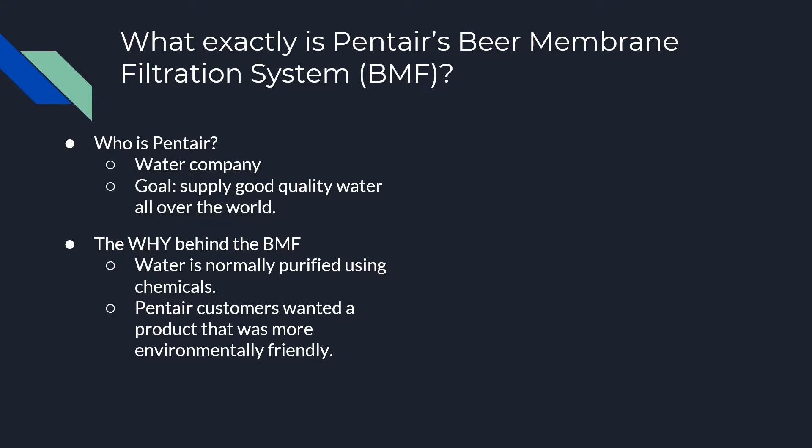So why decide to create a beer membrane filtration system? Traditionally, companies clean their water using chemicals. However, Pentair's customers were very concerned with ensuring that they were using environmentally friendly practices in all aspects of their business, including the water they use when making their products. This is what has driven the need to use membranes to clean or check the quality of water instead of using chemicals that could potentially be harmful. This is what has led Pentair to start designing their beer membrane filtration system.

So, what is the BMF? Pentair's beer membrane filtration system is a purification and filtration system that can monitor and then filter the beer based on the quality control settings that the customer has the system set to. The system also utilizes Amazon Web Services, known as AWS, which utilizes the Internet of Things and stores the information it gathers in the cloud.

Pentair's beer membrane filtration system serves two purposes. The first was to help create a more environmentally friendly water filtration process for Pentair's customers. Second, it was also created in order to help Pentair's customers create more consistent and better tasting beers.

So, what are some of the benefits? First, it significantly reduced the waste and water usage, and it also has automated much of the filtering process in the beer production process. Then also the Amazon Web Services Internet of Things allows companies utilizing the beer membrane filtration system to connect all of their systems and devices together.

This allows these companies to compile large amounts of data and analyze the data at any time and in any place, as long as they have access to one of the connected devices.

As stated earlier, Pentair's beer membrane filtration system utilizes Amazon Web Services. AWS provides many different services and tools that are easy to use and customizable, which is why Pentair decided to utilize the system in the first place.

Since Pentair had never used the AWS system before or anything like it in the past, they needed help. That is why they enlisted Brightwolf, an industrial solutions company that initially helped Pentair build their infrastructure and set up the AWS-based software system. After this initial setup, however, Pentair did form a dedicated R&D team that was able to make changes to their AWS system in the future as they needed.

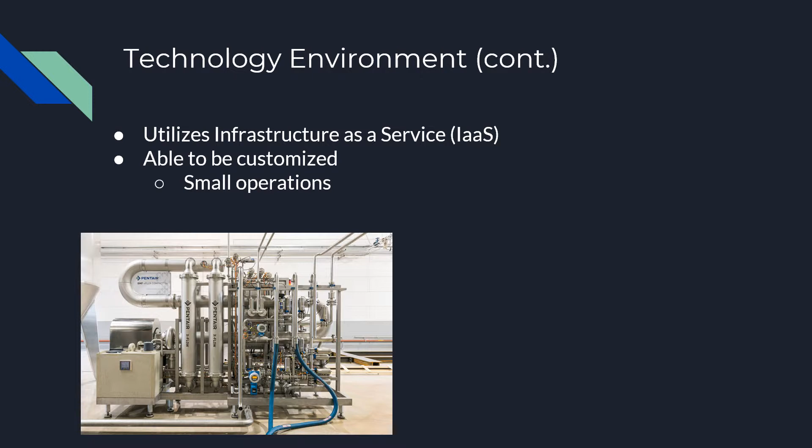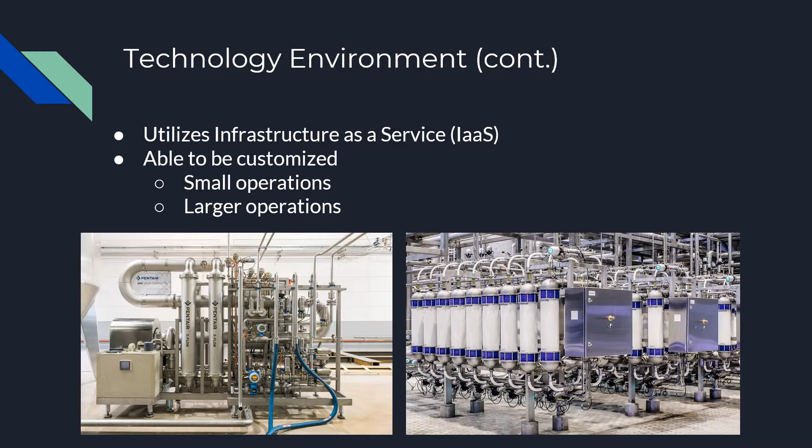For instance, the beer membrane filtration system uses a small scale system which can filter 3 to 6 hectoliters per hour, and large commercial breweries can utilize larger scale systems which can filter up to 900 hectoliters per hour.

When it comes to Pentair's development process, currently Pentair's policies and procedures are considered proprietary information. So while the documentation is not made available to the public, it is made available to vendors to ensure that they are adhering to the policies at all times.

Despite not having access to these documents, this is what we were able to discover about the development process. The idea to create a beer membrane filtration system stemmed from Pentair's customers, as they wanted not only consistency, but they wanted to ensure that all the processes they were using were as environmentally friendly and safe as possible.

At the time the request was made, Pentair did have a viable IT application development staff that began researching possible solutions that would work well for not just one client, but all their current and future clients as well. So the team made sure the system they chose would be customized and built to suit the needs of their clients.

Since the beer membrane filtration system was designed to be a future-proof system, it allows breweries the freedom to invest in only what they need at the moment and still have the ability to expand as needed. Pentair also made sure to utilize systems and procedures that would ensure their databases were protected by logs and audit trails.

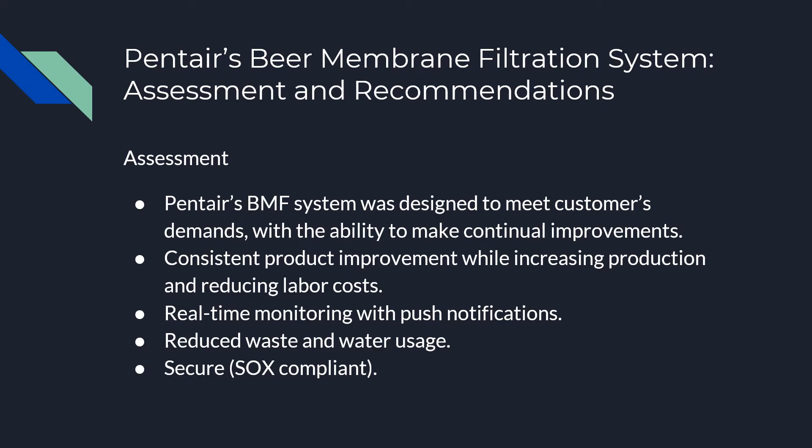Our recommendations for Pentair in the future would be for them to continue to support and update the beer membrane filtration system based on customer demand. Pentair should also continue looking into new technology to further improve their processes.

Some examples would be further Amazon Web Services that they haven't currently utilized, or looking into Raspberry Pi services. Finally, Pentair should continue to focus on building an in-house development team to minimize their dependency on outsourcing for these types of projects in the future.

For this project, there were two major data sources that were used. The first was a video that was actually a presentation given by the leaders on the Pentair project. Some of the leaders were from Pentair as well as from Amazon Web Services. These gentlemen spoke at length about the beer membrane filtration project and helped provide a lot of insight into the uses of the Amazon Web Services Internet of Things and how exactly Pentair was able to utilize Amazon Web Services with their system.

The second data source was a presentation by Pentair to members of the UK Brewing, Food and Beverage Industry Suppliers Association, entitled Practical Applications of Darcy's Law and Beer Membrane Filtration. This document was very helpful because it is all about the business benefits of the beer membrane filtration system as presented by Pentair.